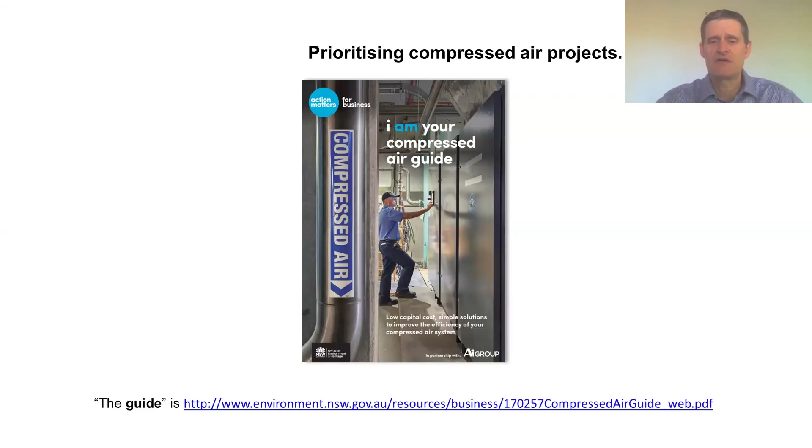So compressed air is a utility to support production. So when we come to set our priorities, our priority is to get production equipment working properly. Normally the customer's got a list of problems they want us to deal with. We then look to improve production rates and the compressor room reliability. And then energy efficiency work comes after that, but there's usually already been savings from the first two points.

We start by logging the system at once a second, and it's important that it's that quick so we can see what the controls are actually doing and we can diagnose the problems. That data we then average to 3 minutes to better reflect what's actually being used by the system, not what the compressors are pumping into it. And if you don't do that, you end up with lots of blurry lines, which you can't make sense of.

Any report must have a power versus flow or an efficiency curve in it. And the reason why is because it's the shape of that curve that I use to prioritise projects. And it also feeds the economic arguments for any air saving work you do. So have a look at some of these sample curves.

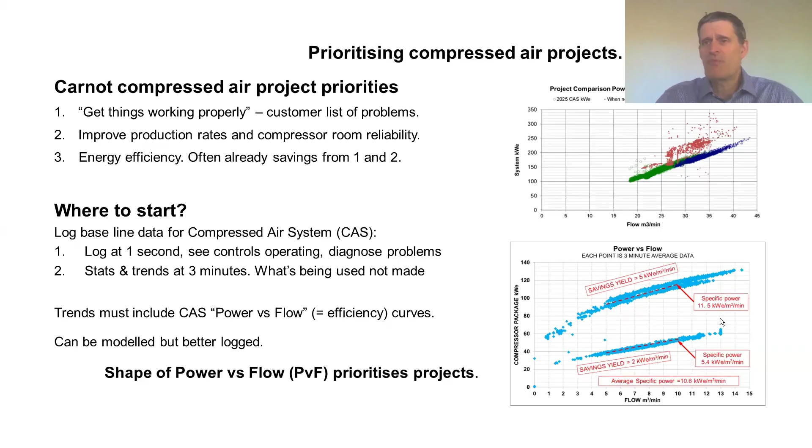So some quick bit of jargon. I won't go through all of this, but what I will point out is the high priority of condensate drains. Craig mentioned timed drains blasting off left, right, and centre and water everywhere. There's some quick numbers there for Melbourne and how much water you use and why timed drains waste air.

If there's a timed drain on the system, a high priority is to replace it with a no-loss drain, say a float drain, an electronic level sensing drain. The ideal system has actually got duty standby drains on it. Float drain is a duty drain, electronic drain is a standby drain, and we monitor the valve in the standby drain. So if it needs to operate, there's a problem with the float drain and maintenance can come and fix it.

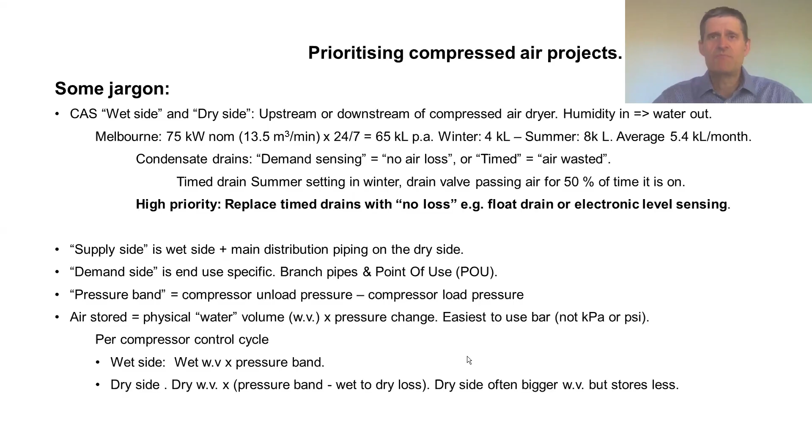The points down below are bits and pieces of equations, but what they lead us to do is understand how much air is stored in the system each time a compressor cycles. So load, unload cycle, we're talking oil flooded screws here. And the reason why we need to know that is because it then leads us into understanding the compressor system factor.

Now, CSF would be novel for most people. Those that have read the guide would have read it. Those that have listened to me from time to time might have heard of it. What it is: how much of a compressor's capacity is stored in the system each time it cycles. And you can see the equation there. And the beauty of CSF is it explains the shape of PVF curves.

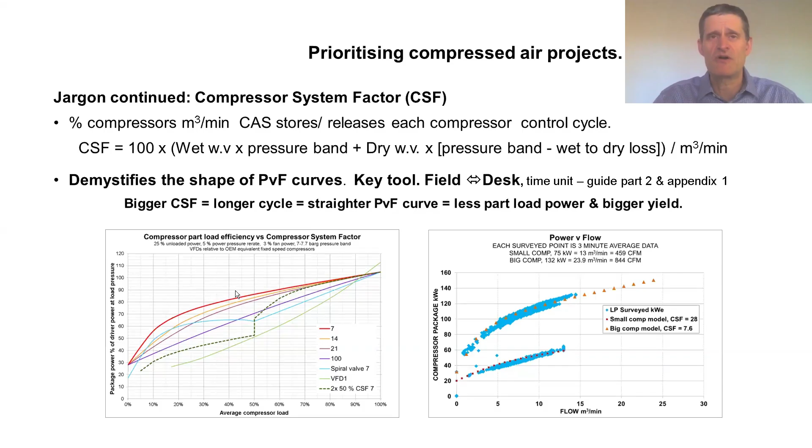While these curves are about oil flooded screws, the same concept applies to other compressors. Centrifugals, not so much. As Craig said, if you get below the minimum turndown, they'll start to blow off, and then you'll have a curve which is just flat, and you can save all the air you like, and you'll just blow off more air. So there are special cases, but the technology and the concepts are still the same.

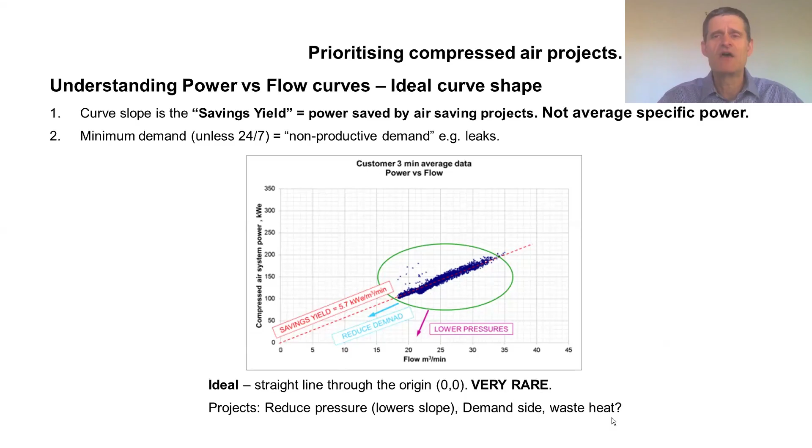So we start to look specifically at the curves. There's three main classifications for the curves. You've got the ideal curve, which is our ideal system I've shown here. It's a straight line, can be drawn straight through to 0, 0. So the savings yield is your average specific power. What sort of projects do you do here? Well, you reduce your demand, so you reduce the power that way. You can lower the pressure, which drops it down here, and maybe do some waste heat recovery work.

But once you get to the left, your savings yield drops off. So your priorities for projects have to change. You then come back to looking at how can I improve the CSF, which will straighten the curve out a bit instead of being domed and give you a better yield for any energy saving works you want to do. And lowering the system pressures will drop everything down and reduce your overall power consumption.

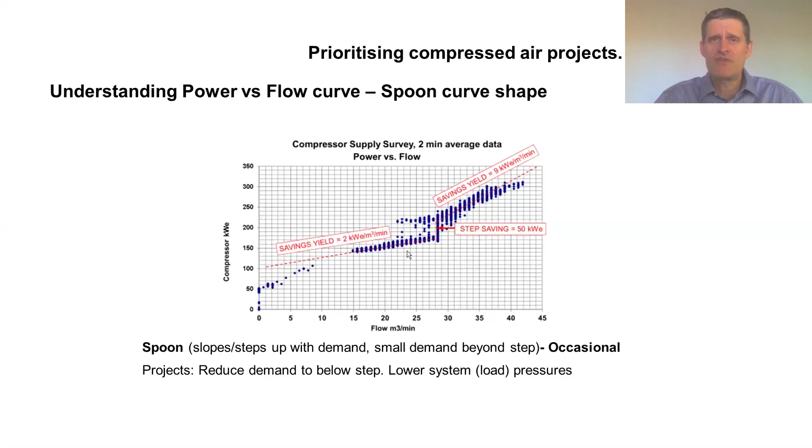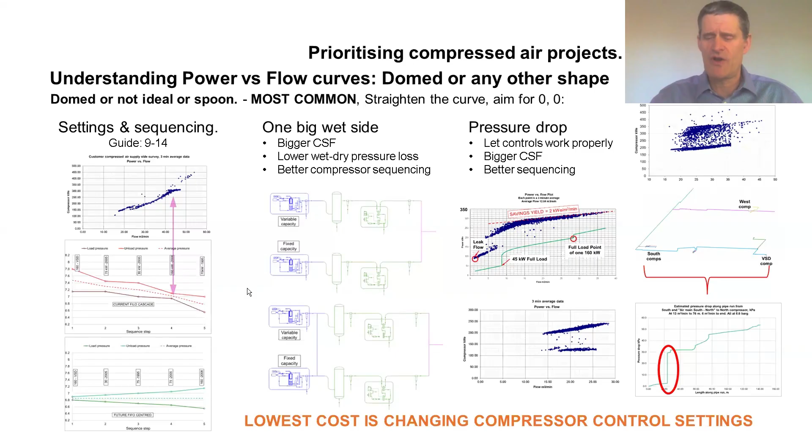Pulling some of the points together to make your system more efficient in the future. Here are some quick points that we've pulled out from the rest of the slide. With our ideal system, the compressors were bought to a specific function. There was a VSD, high efficiency VSD. There's a high efficiency baseload machine. The backup machine was almost as cheap and nasty as you could get. You don't need to waste money on tech for your backup machine.

You are sizing your compressors for what they intend to do on the system. You don't buy a chainsaw to do the work of a hacksaw. You don't buy the hacksaw to do the work of a chainsaw. Same thing with the compressor. You buy the compressor to do what it's meant to be doing. As Craig mentioned, your smallest baseload machine needs to be smaller than the trim compressor, or else you will get control gap issues, as they're called. And as we saw earlier, the more and smaller the number of machines, the more efficient you are. It also means you can have a smaller trim compressor and your backup compressor will cost less.

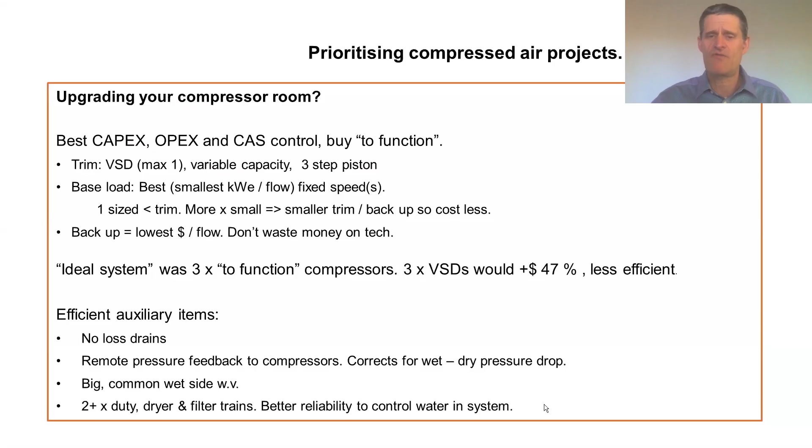On your auxiliaries, insist you get no loss drains. Remote pressure feedback for the compressors: it stabilises your system pressure and corrects the wet to dry pressure drop. Big common wet side volume, and two duty filters and dryers, so you get better reliability and better control of any water in your system. Once you've got your PVF curve as flat as you can, we look briefly at some demand side stuff.

To me, I realised that any method of saving compressed air comes back down to one of 6 savings methods, and they're listed there with some examples. You can see here, if you've got a pressure gauge on a regulator which is flicking around a lot, you've got poor regulation and you're wasting air when an actuator moves. So the sort of activities I'd be looking at is doing a regulator survey to make sure your regulators are actually properly set.

Remember, with an actuator, it's the differential pressure across the actuator that does the work, not the supply pressure. So often people will have dialed up the supply pressure and then use the speed controllers to make sure that the differential pressure is right. You can go through and tune all that, and page 25 of the guide afterwards tells you how to go about doing that.

More efficient devices. If you've got pipe nozzles, yes, you can replace them with more efficient nozzles, but you can also crimp them in the right fashion a little way back from the outlet to greatly reduce how much air they're using while still maintaining the same force. You can read about regulators and how they affect air consumption, and how to go crimping pipe nozzles, if you go to airbestpractices.com, a trade magazine in the US. If you search on my name, you'll find 2 or 3 of the articles that I've written for that magazine.

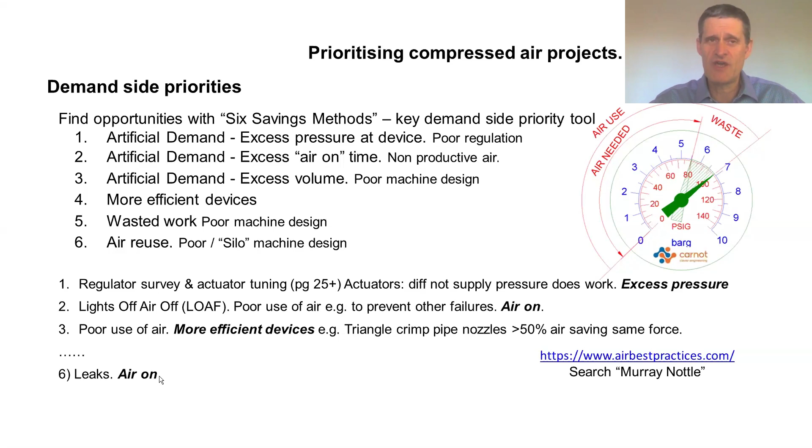And yes, on the demand side of things, there's doing air leaks. That's artificial demand, excess air on time, just turn things off. If you're going to do leaks, remember that the easy bit is finding the leaks. The hard bit is doing the repair management work. You'll need to allow 2 or 3 times the cost to actually manage repairing the leaks and doing the leak repairs than actually finding the leaks.

So with that, thank you. Thanks for listening. I hope you realise the importance of having a PVF curve for your system so you can prioritise compressed air projects for the best rate of return, and also so you know what savings yield to use for any demand side work so you don't overestimate the savings and so no one's disappointed by the results.